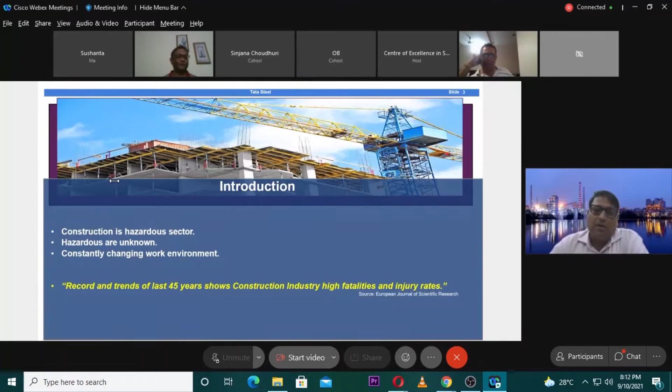So if we talk about the construction sector, just a small brief on what is happening. The construction industry accounts for 31% of all fatal injuries to employees. The fatality rate at construction sites is very high, and 3% of construction workers sustain a work-related injury every year. On average 45 fatal deaths occur per year, and almost half are caused by fall from height. I will also be talking about the various reasons why these accidents happen in construction.

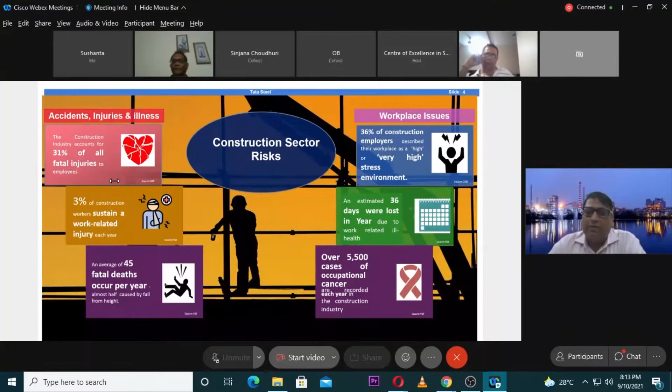So an estimated around 36 days were lost in a year due to work-related ill health, and then over 5,500 cases of occupational cancers because of the construction industry. So what are the different challenges?

Like I said, the job is very complex, as you know, it entails all the engineering in one construction. If you're doing construction, you will be using civil engineering, mechanical, maybe refractory, electrics, electronics, instrumentation, whatever you can think of is normally a part of any construction.

So any core industry, of course, and mobility is there, because if you come on a particular day to some construction site and visit the next day, maybe excavation might be happening over there, or you will find some foundation over there. So it is completely mobile, or if it is in the finishing stage, you will find people painting, people doing finishing jobs.

And also it is unique. Why am I saying unique? Some projects are such that you will be doing them once in a lifetime. There are many huge big projects, so it is unique, in fact. And like I have already said, a lot of agencies normally come and work, and hazards are changing. Sometimes you will find excavation, some foundation, or the columns going up.

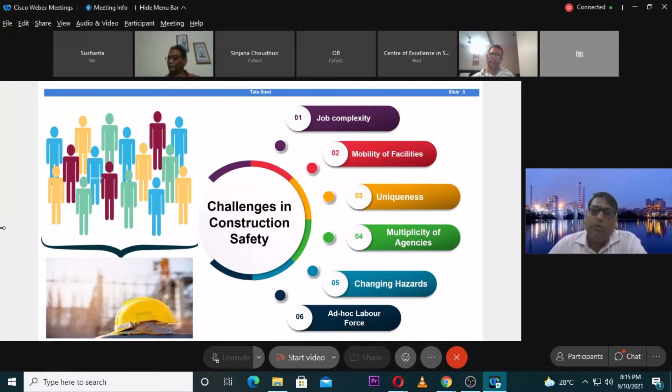And these are the major reasons; in fact, there are other reasons also, but I have sorted out the top 4 reasons because of which these accidents happen. So first is fall. Fall is a very common thing. Even if you go around the city, you will find a lot of high-rise buildings coming up. A bare minimum thing which I always say is the safety harness.

You will find people not wearing it because in India, as you know, the risk perception is very low, or maybe we have never been told or taught to follow all these safety rules. So fall is very common because of our ignorance or lack of knowledge. Fall is a very common thing.

Then struck by object is there, means you are standing at one place and, because things are changing every now and then at a construction site, you may be struck by an object. Then being caught: many a time it so happens that you lift a pipe or a column, and you come in between two objects and get caught in between. And finally, electrocution.

So electrocution, why? Because everything is temporary, you don't have a permanent thing. Live wires are a very common reason for electrocution-related deaths in the construction industry. Live wires can occur in circuit breakers, control panels, light fixtures, transformers, everything. So it's very important that you follow particular rules in order to systematically bring down these incidents at construction sites. I'll move forward.

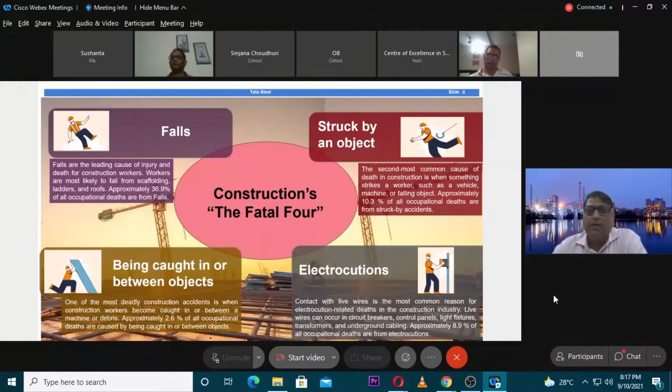This is just a brief illustration. LTIFR is something which everybody knows, I think. This LTIFR has come down in Tata Steel very systematically. We have been implementing a lot of things, like safety policy governance, an IT-based platform. We have felt leadership training, a very important training which we normally give to each and every employee of Tata Steel.

In 2012 we introduced zero cyclist, because the footfall is around 45 to 50,000 inside Tata Steel Works, I'm talking about Jamshedpur. We introduced this game changer of zero cyclists; previously people used to come on cycles. Then introduction of process safety, road infrastructure, and a recalibrated risk matrix, which we have now started using in our projects also.

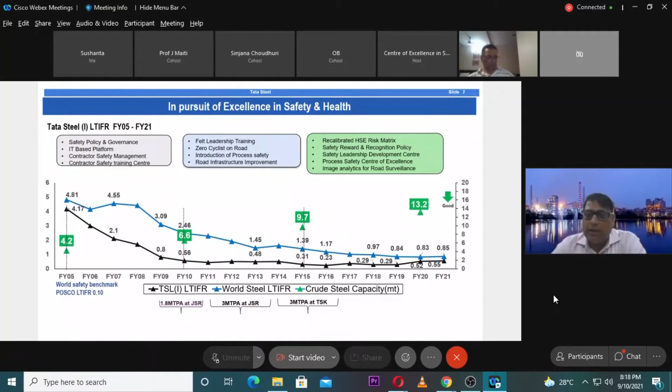Although I don't have a slide on that, I will speak on it. Then we have safety reward and recognition, and a process safety center. Now we are talking about data analytics and experiential learning. So these are the things we have been doing, and we are trying to achieve zero harm. That is our goal, and we are continuously moving towards that.

Now coming to projects and construction, this is a very important area, and because we have been doing things very systematically, because of our approach, we have been able to bring down the incidences, especially in projects and construction. If you see, in all areas it has come down, but I'm just showing that there are several initiatives we have been implementing, like e-work permit, 6-party clearance, e-learning modules for vendors, and connected workforce, and I will talk on all these things in my subsequent slides.

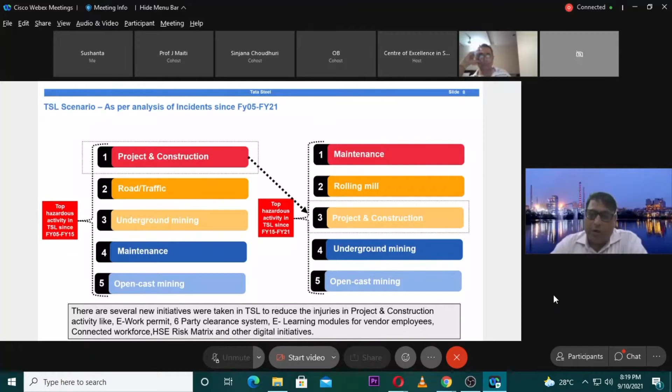A lot of digital initiatives we have taken. I have already told about the HSE risk matrix. So if you talk about any project, we say that it has 5 stages, and at every stage you can get involved and mitigate the risk associated with the hazard. We call the first one the P0 stage, which is basically concept to approval.

So the concept, when you are visualizing things, that is P0, where we try to list down, because we have a robust system where if any incident is happening, there is a learning. So first of all we implement all these learnings across Tata Steel, and if a new project is coming, we try to see during the conceptualization stage itself that all these learnings are getting implemented there. I can give you a lot of examples around that.

Suppose any moving machinery needs to have a guard, so that will be part of it, because you need to understand that you will be doing the estimation of the project. So while you are doing the estimate, you need to estimate it well. I don't think doing safety things will cost you a lot, but still, as a process, we incorporate all those things.

Then the detail visioning phase, or you can say, once the project is passed, we work on the detailing part. And here come safety factors in design. Basically, the project now moves onto the drawing board. When it moves onto the drawing board, a lot of things come in, like, if you are trying to build a plant, its ladders, or its steps.

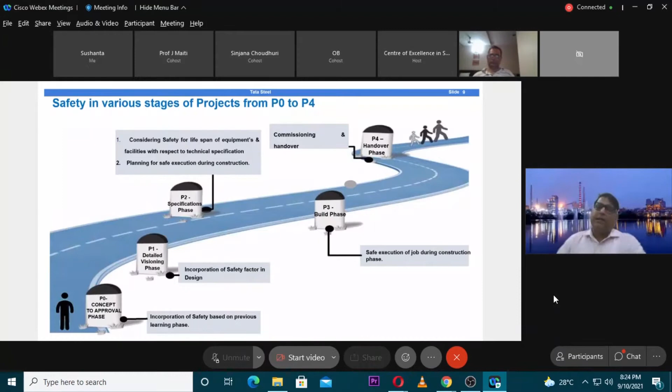So a little bit, I think you guys may be knowing about design prevention, because everybody might be studying about this. But I just wanted to bring these 2 or 3 slides to bring out the aspect of prevention through design. Basically, it is addressing occupational safety and health needs in the design process to prevent or minimize the work-related hazard and risk associated with construction, manufacture, use, maintenance, and disposal of the facility, material, and equipment.

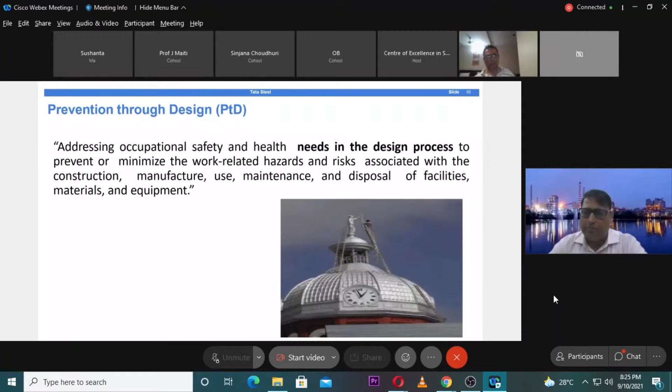So you can understand, as I have said, that it is two parts: construction is also important, and then use and maintenance, means operation and maintenance. So prevention through design will help us. In fact, it is a very big, vast subject, but of course we need to start. If any big company is there, we can go ahead with this.

So this is a small example over here. What we are trying to say is that there are 2D drawings which are available, so you need to create 3D models. Why 3D models? Because by converting the 2D drawings into a 3D model, you see a lot of difficulties which you cannot visualize. As you know, whoever is part of construction, it is only the 2D drawing which we normally see, and based on that we do the construction. But if this tool is available to us, where the complete 3D drawing is available, it will be very easy to visualize and use this visualization technology to represent construction components and processes.

In fact, I have a small video also, which we normally develop before any construction. So I'm just trying to take a snapshot of all those processes. Then the VR construction model, then virtual walk, you can do a virtual walk. In fact, there is something called clash diagram, because, as I have said, mobility is there. Mobile means you will have different types of cranes you will be using. Are those cranes clashing with any of the structures? That you need to see on your drawing board. Then you need to identify some hazards. There may be some hazards which you may not have identified, so maybe you can identify those hazards and eliminate them.

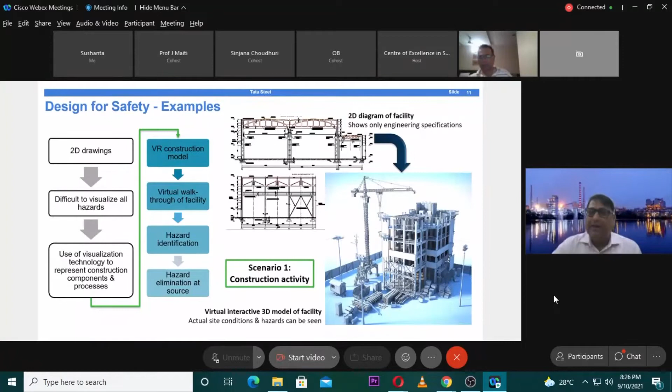Okay, so this is scenario one. And scenario two, what I am talking about is that you don't have anything. You only have the P&ID diagram. So what to do? This is a chemical plant, and let me tell you, I have got an opportunity to build two chemical plants. We call it gas cleaning plant, byproduct plant. So this is a very important tool in today's context. Previously when I was doing this plant, we were not having these tools. That time it was completely visualization. I think you guys are basically process safety personnel, so you know about process safety.

So in process safety, there are a lot of things which need to be provided, like for containing the spillage you need to bring in a dike wall. You need to have a minimum distance between two installations. That you can only do if you are able to make something on the drawing board in a 3D form. So these are things which will help you to analyze directly. And why am I showing this? Because when you are ordering, you might know that nothing is available. It is only the P&ID, and from my experience, you have to visualize the thing. So if you happen to create that, then certainly you will bring in all the aspects related to safety and of course maintainability and other things also.

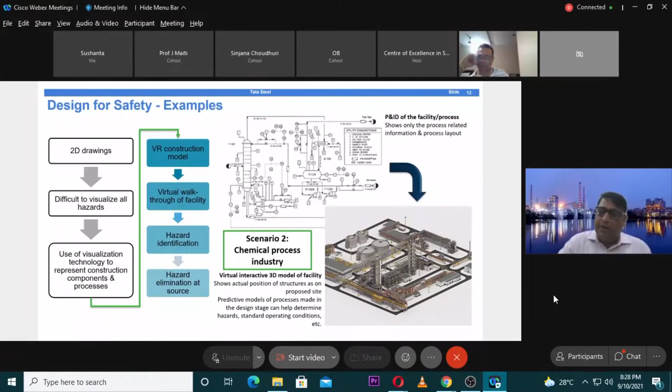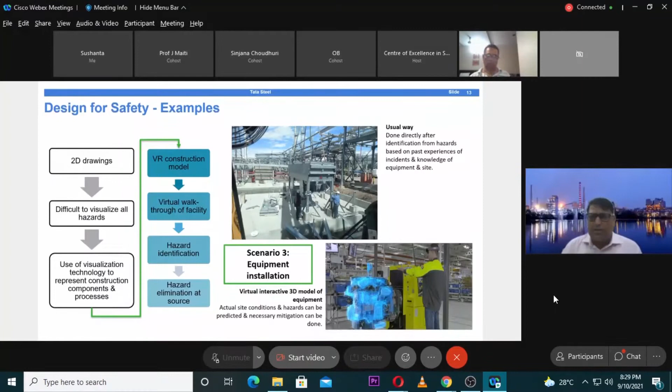And the last thing was equipment installation. So can we convert all the equipment into 3D models and try to see then and there, like suppose if you are lifting, what is the load? So you can decide your cranes. What will be your boom length? At what place you can position it? These are the things which you can easily imagine if you are analyzing, and this is done directly after identification from hazards based on past experience, incident knowledge. So that process you guys know basically.

So these are some of the major technology adoptions in construction. One I have talked about. I will be talking more on prevention through design, and bolted structure is again part of prevention through design only. Then I will talk on bolted structure, then accessibility and maintainability, which I have already tried to touch upon. Then monitoring the site activities.

This is a very important thing, let me tell you. As I said in the beginning, we Indians do not have the understanding of, so to say, risk. Or even if we have, the risk perception is very low. So it is very important; we only understand policing. So sometimes a monitoring system also works.

Then you have artificial intelligence, which is coming in a big way. In fact, in the construction industry, on roads, we have been using it. Now we are moving on to the construction side, wherein you can easily capture violations, or if somebody is making a mistake, you can easily do that.

Then comes data analytics. As you know, with big data you need to analyze data and try to find out exactly where the problem is. Then we have centralized data management, MIS, statistical analysis and all those things. And then we have migrated to a 100% e-work permit system. I'll talk on this. Then we have also started safety observation through digital modes.

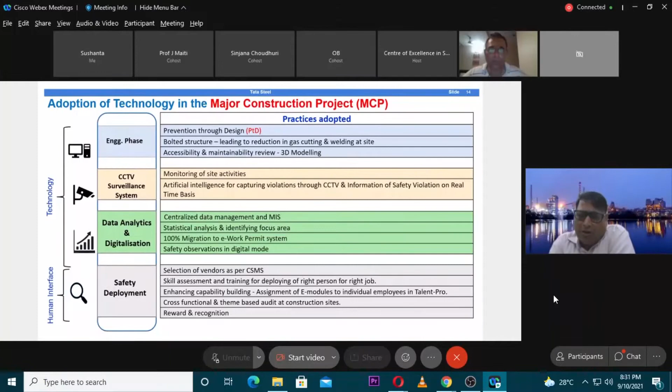Then we have safety selection of vendors through our CSMS. We have a very strong one, but that's altogether a different subject, not part of today. And skill assessment, capability building, cross-functional theme-based audits and all these things we are doing.

Now, what are the various best practices? I have already talked about prevention through design, and bolted structure. What we are basically trying to do is minimize the number of persons at the construction site. That is the motto. Because structures like these we can manufacture outside, not necessarily at construction, in a shop atmosphere where you have more control over the system. So this bolted structure also reduces gas cutting and welding at site.

Then constructability and construction mock-up for critical and high-risk, for better visualization. This I have already talked about. And clash detection to avoid rework and all those things. Accessibility and maintainability reviews can be done through it.

The last project I was doing was a BOD plant, a water cleaning plant. There was a space constraint, so multi-story buildings were made. We made a complete 3D of that and analyzed each and every corner through 3D, like how the crane will approach and all those things. Then we incorporated temporary platforms and approaches at the design stage only.

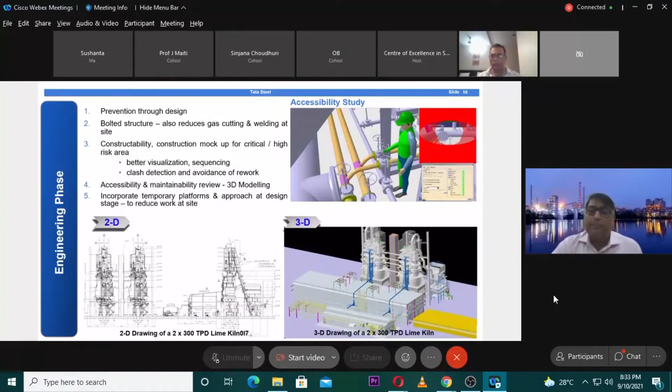This is a very important thing because, as I have already said, most accidents happen because of falling from height. So it is very important to give ease to the construction worker. We analyze where we can give a temporary platform, where some critical welding is required to be done. These are there in the design stage only. The drawings you are seeing here are actual snapshots of what we are doing. This clash diagram I have already explained.

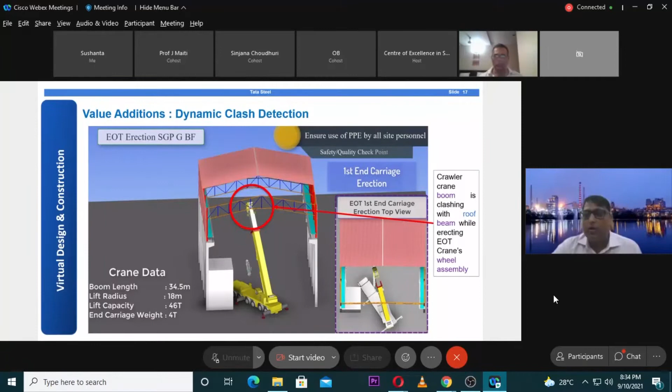Suppose you are making an EOT crane and you want to lift the girders. In the beginning only, you need to see what type of crane you are going to bring in, what will be the boom length, the lift radius, the lifting capacity, and the load you are going to lift. If you see it early, you can do the engineering in a better way, and then during erection all these problems will certainly not happen.

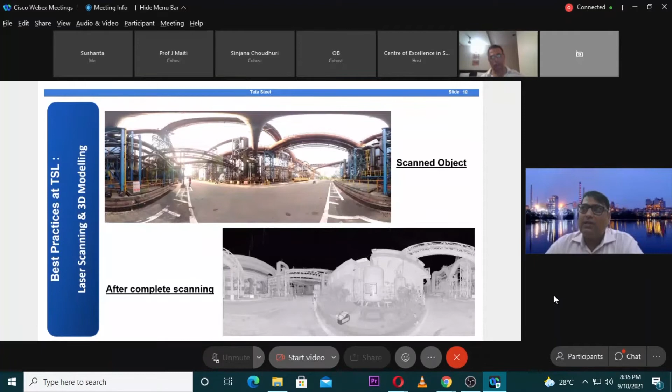There will be a hell lot of, in fact, the next slide I will be explaining you. So there is a scanner which we have. So we do the scanning of that area. Scanning is the live scanning, 3D scanning we call it. So if you see this drawing, there are two parts over here. On the left side, you can see this is, I will say, the raw data which we normally take from the scanner, and these are known as point clouds.

So these are the point clouds which we have created, and based on that, after doing modeling, the right side is there. Now, once you have this drawing, try to understand, because in old plant, all drawings are not available. So now you have a complete picture exactly how you are going to do the erection, and this is an actual case where I was the project manager, and we were supposed to reroute all these pipelines.

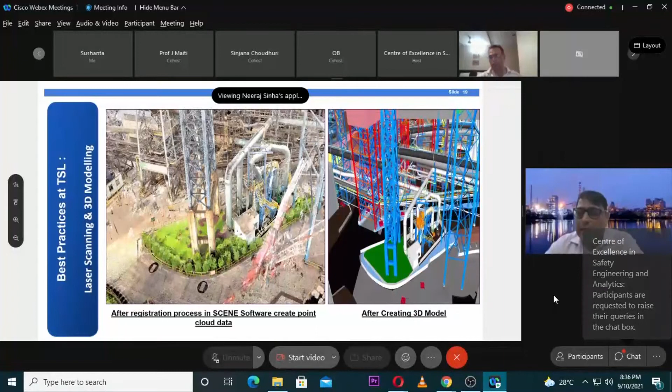Okay, so you can understand the type of structure which is there. So this has helped us to analyze the whole thing, and we were supposed to use the existing structure also, and the civil foundations were supposed to be made by the side of this. So you can understand so many, and in fact, I have not included that in this presentation.

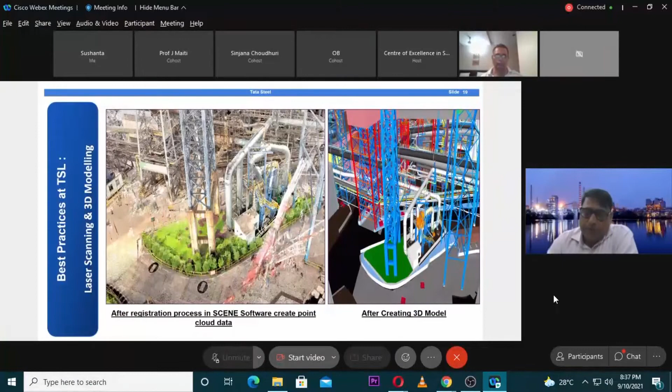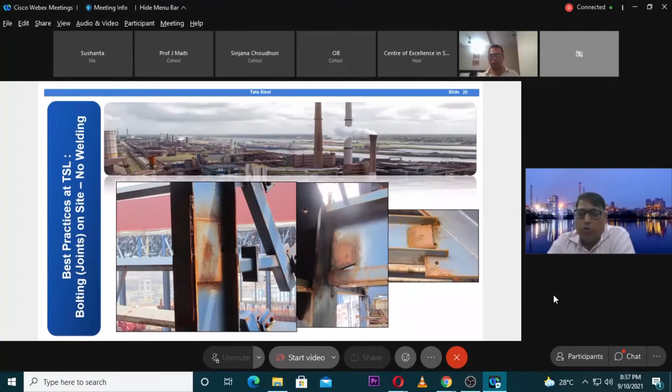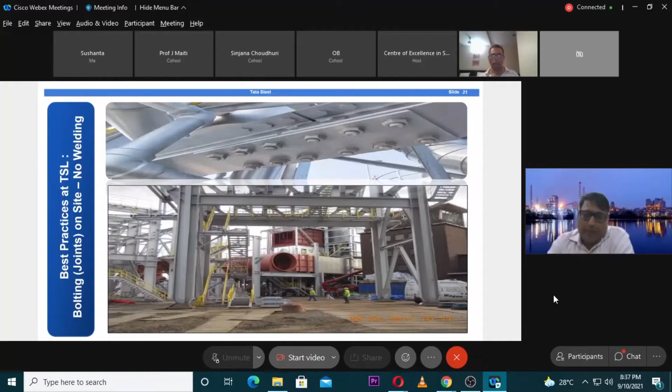So previously, I just wanted to show you two photographs wherein, if you see, a lot of welding and other things used to happen. So currently, whatever we do is a bolted design. You can understand that people need to develop drawings such that it is getting manufactured properly at shops, so that it comes and fits over here, because a fitter with a spanner is required to basically tighten the bolts.

So this is also a very important and good thing, that not only the structural, also the pipes are getting prefabricated outside. Whoever is from the construction field, they can understand, if you try to do the piping job inside, then there is a civil job, there is a structural job, there is a piping job, a hell lot of it will create mess. Now here you see, if you happen to develop the pipes and bring it to the site, then the number of people will go down, number of hazards will go down.

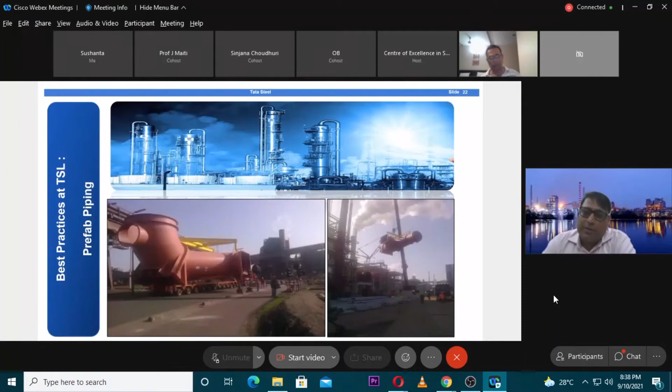Then this is another thing which is again a very good thing, I say. In the civil side, we have been using prefabricated rebar cages. As you know, with rebar cages, the workers will be standing at the site, they will be trying to bind, bending is done over there, and you happen to do it at site. Suppose this whole thing moves off site, the drawings, as you know, all these bar bending diagrams, the rebar cage drawings are there.

So why do it at site? So it is normally done outside the site, and then it is brought over here, and accordingly it reduces the number of manpower interventions over here.

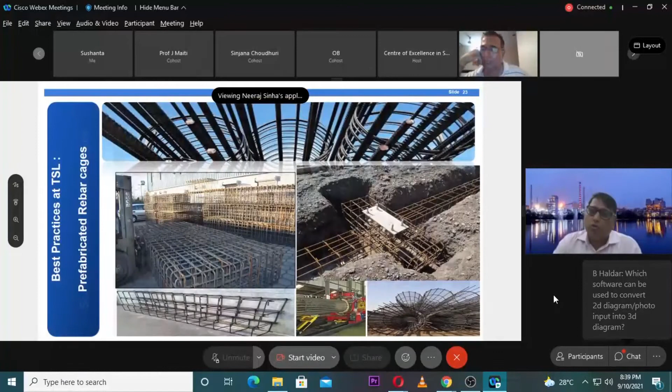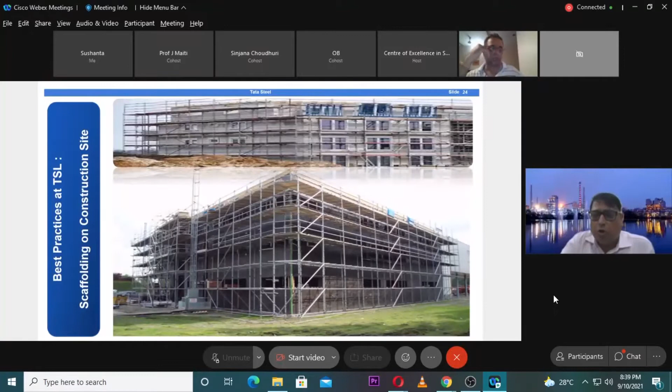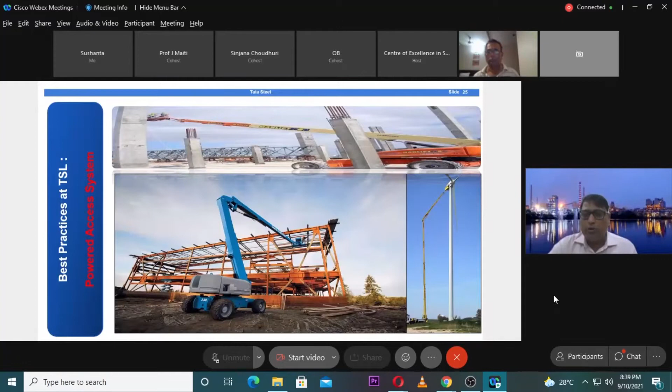So this, I think most of the people might be using, but still, standard scaffoldings, and all scaffoldings at the site are designed, and whatever processes are there are being followed. Because there are scaffoldings which normally go up with the building. So you have a very expert agency who has been doing this. And then this is a powered access system which we have been using in order to reduce those scaffoldings and people going directly.

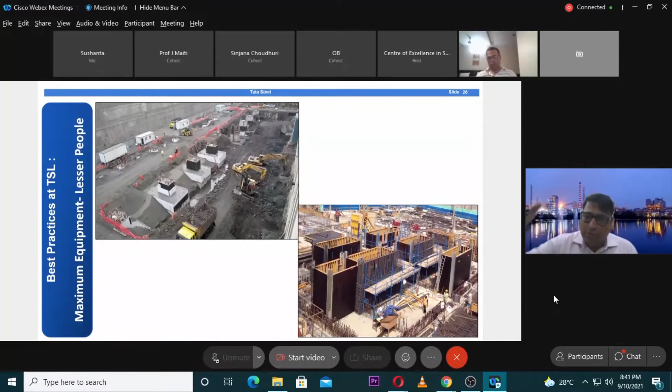The photographs which are being shown on the right hand side, those are shuttering boards. Normally when I started my career in construction, I thought that maximum you can do 1.5 for the concrete pouring and all, but you can take it to 2.5. The civil engineers will be able to tell you what is the maximum you can do, and thereby again you can reduce it. The number of joints will reduce, that is from the quality point of view, and the number of interventions will go down, otherwise every 1.5 you will keep on increasing. So that is another thing.

Then similarly, deck sheets. Normally these deck sheets are very neat sheets which we use when you are doing, suppose, the roof of any building. So deck sheets are used. Then modular frameworks are being used. And again, these deck sheets are part of the design now. Suppose there is any building which is getting designed, with that design, these deck sheets are also getting designed.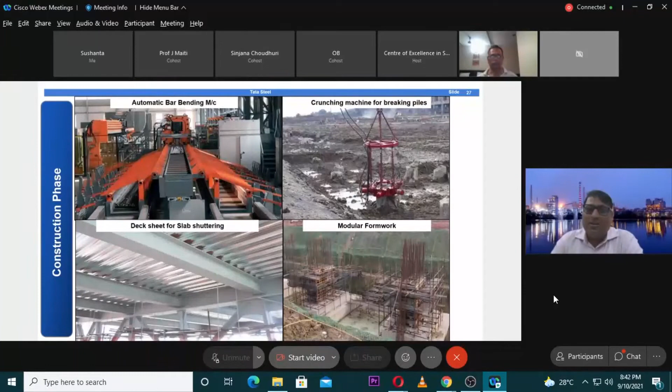So these are some of the digital interventions which we are talking about. In fact, I have not put in a lot of the digital part. There are a lot of digital things which are happening. There is something called geofencing, if you know about that, those are being created. Every person is getting tracked. I said in the beginning that I will talk about connected workforce. Whoever moves around, I can track him on the map, where is that guy and what he is doing. In fact, I will just tell you an example, we were trying to see who all are staying inside the works.

So we were tracking a crane driver. That crane driver had gone out 4 times in 24 hours. So we wondered why he is going out. He was going out to take tea. But at the end of the day, he should leave the site after 12 hours. So those are the things which we are doing. We are tracking, monitoring. Then we have site access control, which we have created, because many a times people come even if they are not required. So we have created the site access control.

Amenities have been created, and again these are all part of the design. Amenities, sheds, restrooms, even the canteens, where people can sit and eat. All these are part of the design process, in fact. And as I remember, when all these things started, I was not in the construction at Kalinganagar, but whenever I talk to my colleagues over there, they were busy trying to make all these things. So these things come handy. You may think it is a short-term vision, but this also improves the productivity immensely.

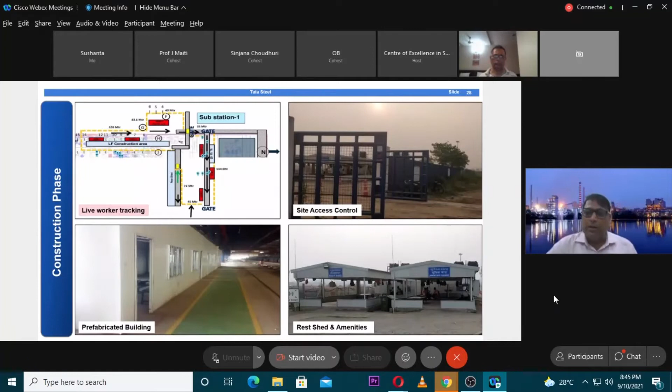If you see, you were doing shuttering of around 1.5 meter, here you do it in 2.5 meter. Now the lifts, you were doing small lifts, and here you can lift it in one go. So your productivity will go up, your manpower will be less, and at the end of the day, the project will cost you less if you happen to do that. And we have been using prefabricated buildings mostly. If you see in Kalinganagar, all are prefabricated buildings, which are very easy to construct.

Then this is an e-permit. In fact, e-permit is not new, it is already 3-4 years old. So we have been doing this e-permit basically to improve safety by capturing every aspect of the process from start to finish. So here you will have the names, you cannot change the names. What is the job which has been given? You are able to visualize the thing.

Here, we have connected it with our qualification, and now we have not created that, but what we are trying to do is assign people who are authorized to do high risk jobs. Suppose you have been asked to give an e-permit to 4 guys, and out of those 4 guys, one guy is not aware of working in the confined space, and your system will not allow you to understand if he is knowledgeable and has the understanding of working in a high risk area. If you don't have that visibility, then naturally you will ask him to go.

So here that visibility has not started. In fact, we are on the way. I will not say that it is there at this moment, but we are on the way. We are going to connect everything: the medical report, his training report. Then, as I have said, we are trying to create experiential learning. So all those things are getting connected over here, so that the right person is at the right job at the right time at the right location.

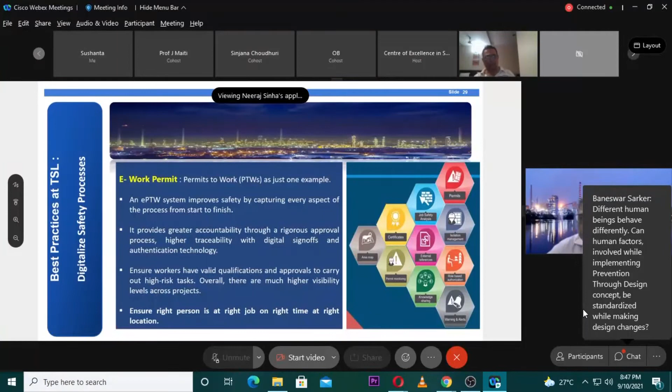I was talking about geofencing, I was talking about access control, I was talking about the right job. If that person is entitled as a welder or a fitter... many accidents happen due to toppling. That's a very common case, F-15 toppling at a construction site. Why does it happen? You will find the flagman who is supposed to do the rigging job will be driving the F-15, because that job is on a higher side. In the hierarchy of construction, driver is considered a better job than showing the flag. So he will be doing that.

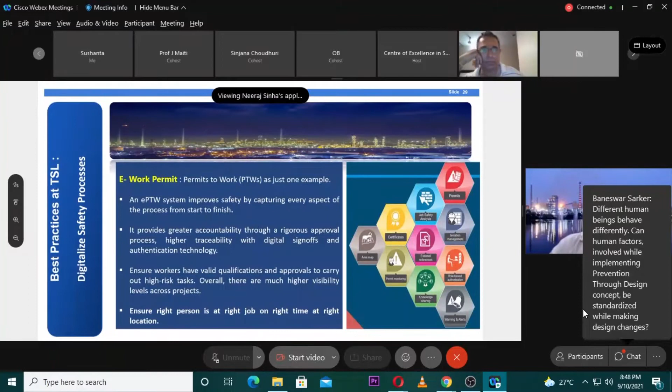And once he does that, maybe he doesn't have the understanding of how much load is required to be lifted. And if you lift more load, then certainly toppling will take place. So all these things will certainly bring in that change, and will not allow people if they don't understand the construction.

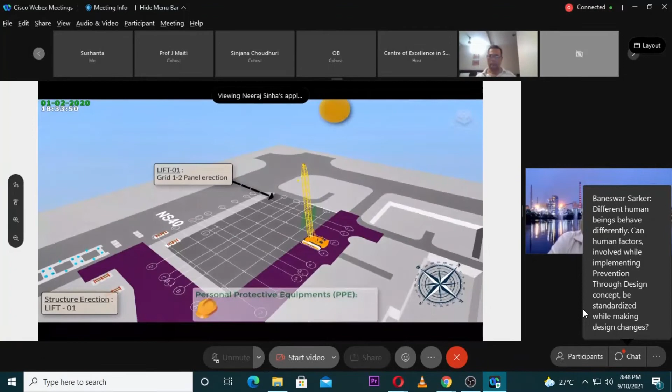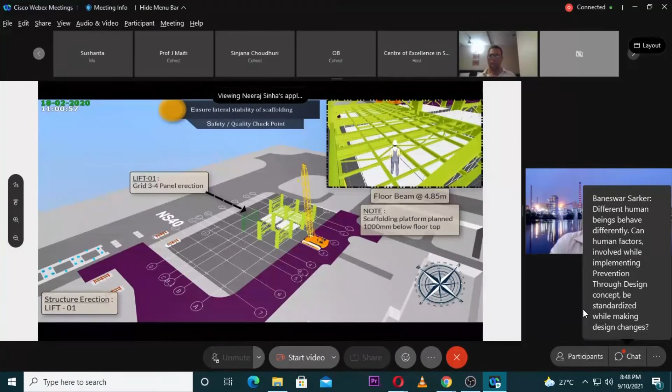And at the end, I had one small video which I would like to show you all, on virtual construction, which I have talked about. So this is how you can basically design your whole work. These are all animated; this is only to show you all. Basically, you can analyze each and every drawing on the drawing board before going to construction. There are some notes and other things given, lift plans are there, so you can design it while you are going for the designing.

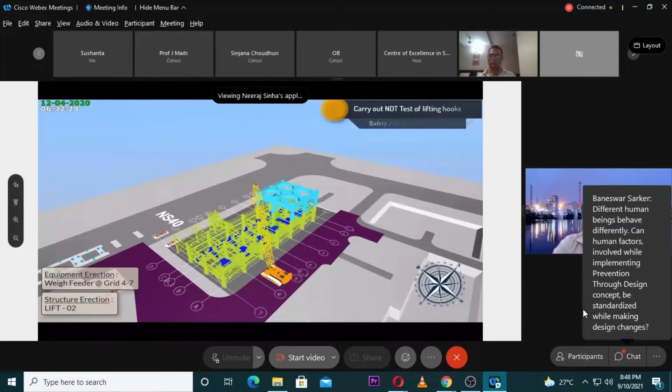So this will give you great visibility and help you, as I've already said, decide where to position the crane. Suppose you are doing this hopper preparation over here. The hopper can be welded outside, and in one go you can lift it and put it in the frame where it is supposed to go.

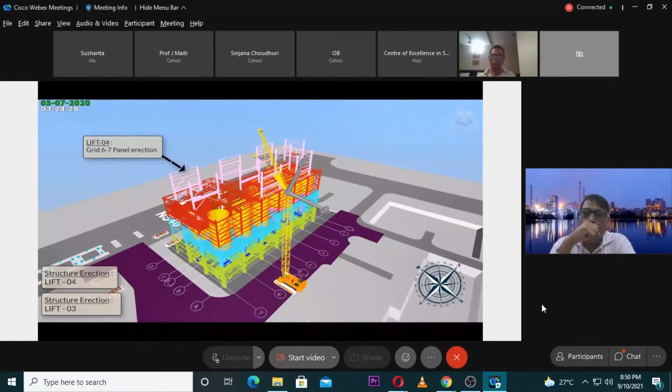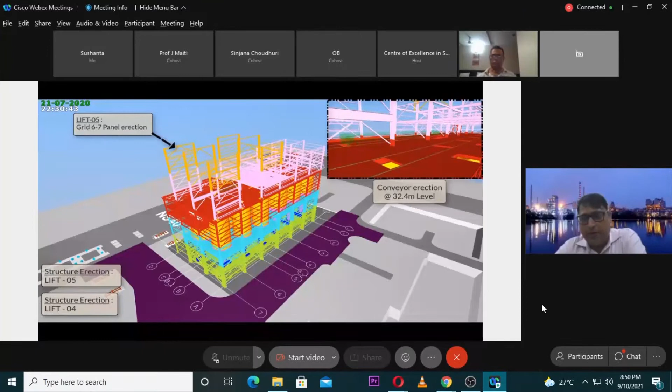And you can see in the upper left hand corner, the time and date is also there, and it gives you a lot of flexibility in planning also, like how much time you will take in doing this.

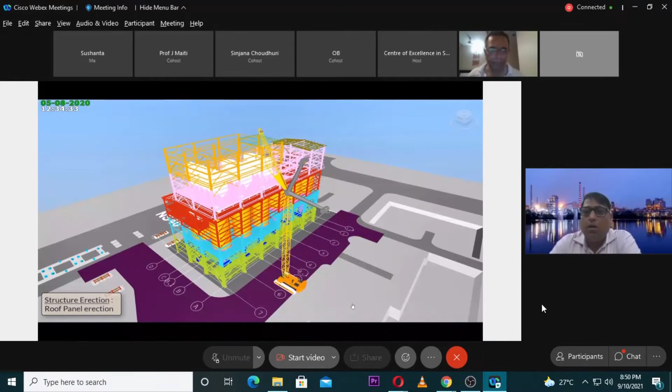So then what is the way forward? I have tried to cover a lot of the way forward in my presentation. The adoption of various safety technology and automation has significantly increased the effectiveness of health and safety management on construction sites. So it has increased, and we need to further leverage digital. Digital is something which, I will say, is inevitable.

As I have said, it doesn't talk only about safety, it also talks about productivity. If you do things safely, then automatically you will do things of quality, and productivity will go up. Construction companies should adopt standard safety practices and policy, combined with implementation of digital health and safety tools and techniques, which could assist site managers and supervisors to coordinate and ensure efficiency of their construction projects.

One more thing which I have not shown here is each and every one of our SOPs. Although we have not done that in construction, e-learning modules have been made for each and every SOP, and each and every person is getting trained on those e-modules. Why e-modules? Because it's a different type of learning. The retention needs to go up. If you show them more and more visualization, then the retention is there. Otherwise, with the normal mundane type of SOP, maybe not everybody will read it. So that is one thing which we are doing, and we will be extending it further.